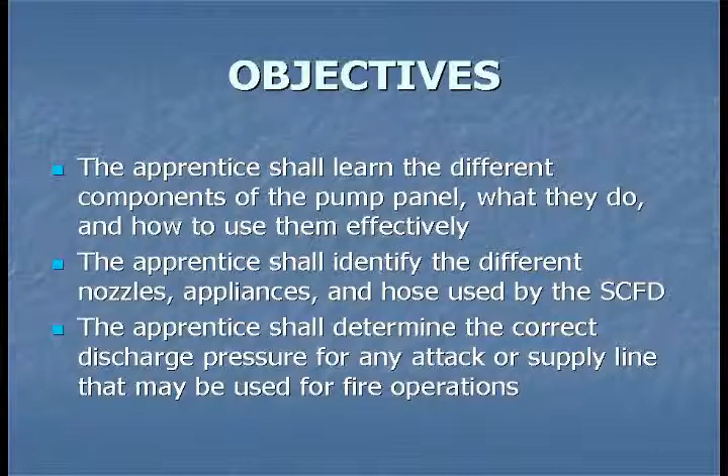Let's start with the pump. On the pump panel, you will find a pump rating plaque. This will tell you what the pump is rated for in GPMs. It's also important to know the amount of water carried on your truck so you can calculate how long your tank will last. There should be a plaque on the pump panel showing the amount. If not, you need to find out.

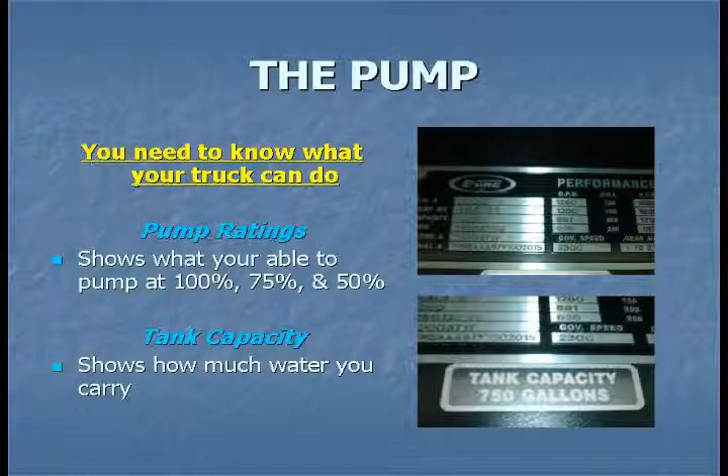In this department, we have two different types of pump panels: midship or crossover, and the side panel. While they look totally different, they both have the same functions. Now let's talk about them.

The tank-to-pump valve is used by the operator to supply the pump with the water stored in the tank. Remember to shut this valve when you have a secure water supply. If not, you'll end up using the water out of your tank.

The tank-to-fill valve fills the water tank back up once you have a supply. It's important to remember to keep the tank filled in the event you lose the supply line.

The throttle increases or decreases the RPM of the engine, in turn increasing or decreasing the pump discharge pressure. The pump pressure gauge indicates the maximum pressure you're getting out of the pump for that given RPM.

Discharge valves correspond to the discharge ports around the truck. Make sure you verify the correct valve for the port the hose line is attached to before opening any discharge valves.

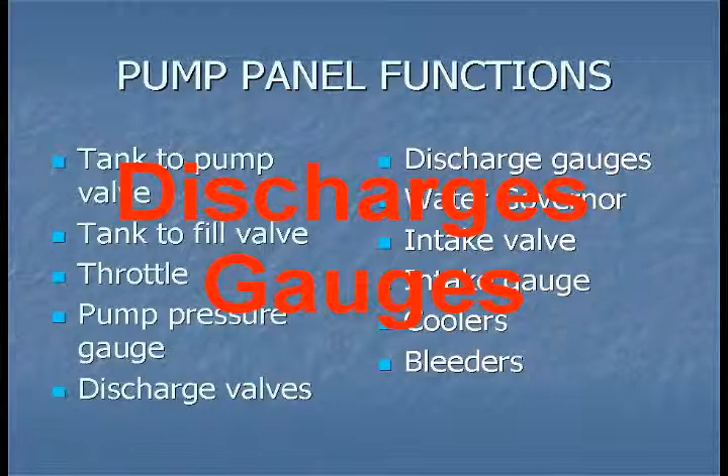Discharge gauges show the pressure on the individual ports. Use these gauges to gate down hose lines in the event multiple hose lines have been deployed.

Water governors and pressure relief valves are both designed to prevent overpressurization of a hose line, which could possibly cause firefighter injury. The water governor works by RPMs. Once the water governor is set, the computer will decrease the RPMs if it senses an increase in pressure.

The pressure relief valve is a mechanical valve and works off spring pressure. When the pressure increases beyond the setting of the relief valve, the spring pressure is overcome, causing the water to be dumped back into the intake side of the pump.

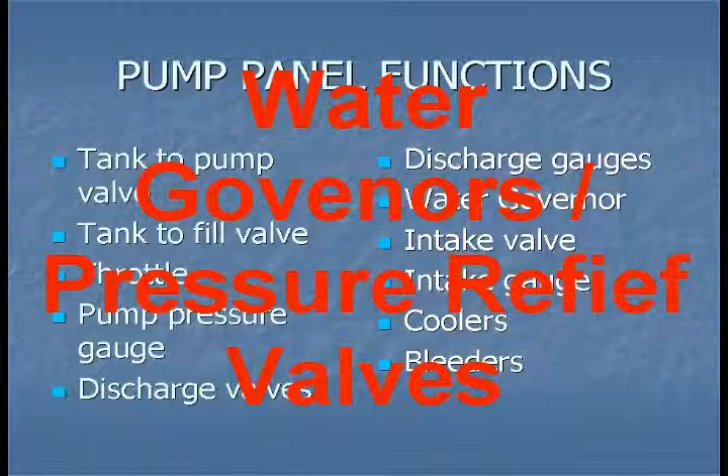Intake valves are typically located next to the intake port. Opening the valves with a water supply hooked to the port will allow water to enter on the intake side of the pump.

The intake gauge shows the water pressure coming into the truck. Being a compound gauge, it will show either positive pressure or vacuum pressure measured in inches of mercury.

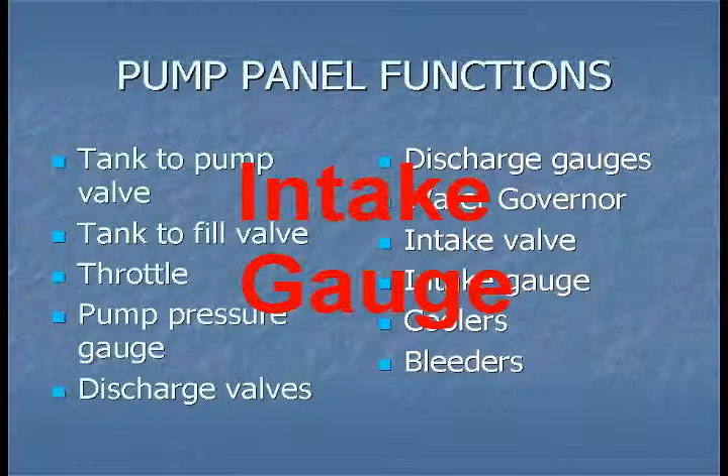Cooler valves are used in the event of extreme engine temperature. Some water from the pump is diverted around the engine cooling system to assist in the cooling. When there's high pressure on the pump, just crack these valves to prevent damage.

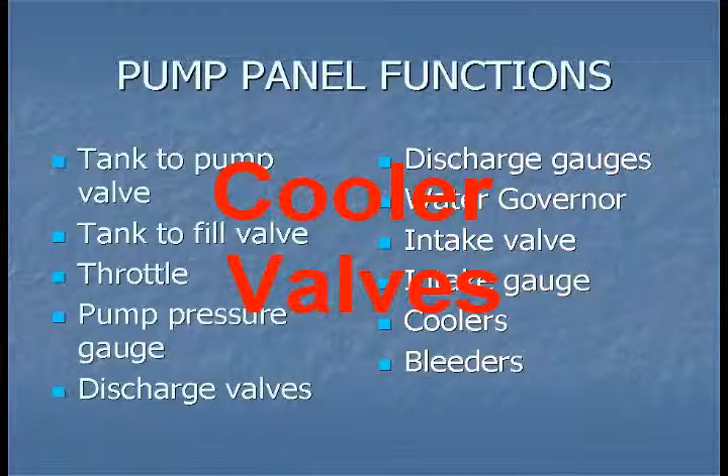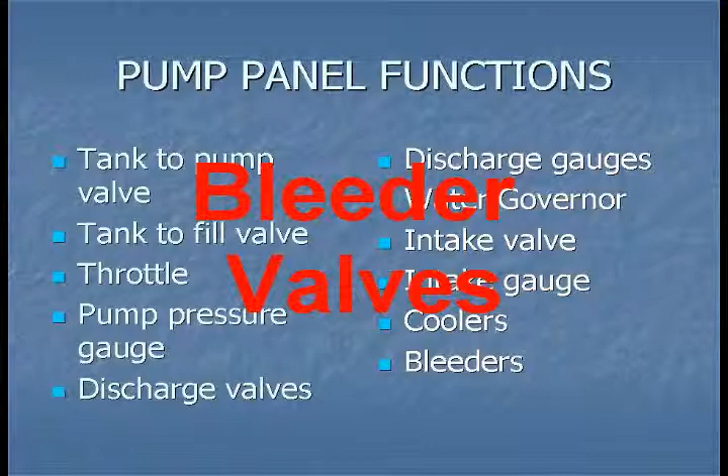Bleeder valves are designed to take the pressure off of the hose to assist in draining the hose line. Work these valves slowly, as there may be a lot of pressure on them. These valves need to be kept closed during pumping operations. Now that we've talked about the functions, let's take a minute to view their locations on the two different types of panels.

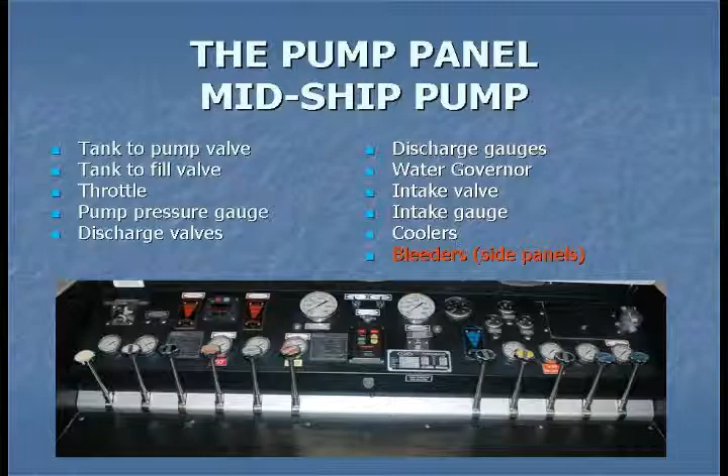Protect the public, that's my desire. Back of my shirt says Tulsa Fire. I take a good look around. I keep a close watch over this town. Gotta make it right, gotta go a little higher. American firefighter. Might be a house, might be a wreck, could be a baby, might be a pet. Yeah, we're prepared to make them all, ready and able for the next call. Gotta make it right, gotta go a little higher. American firefighter. We stick together through thick and thin. They might need me, I might need them. As the heat gets hotter, we fight to win. I walk away alive, alright. Gotta make it right, gotta go a little higher. American firefighter.

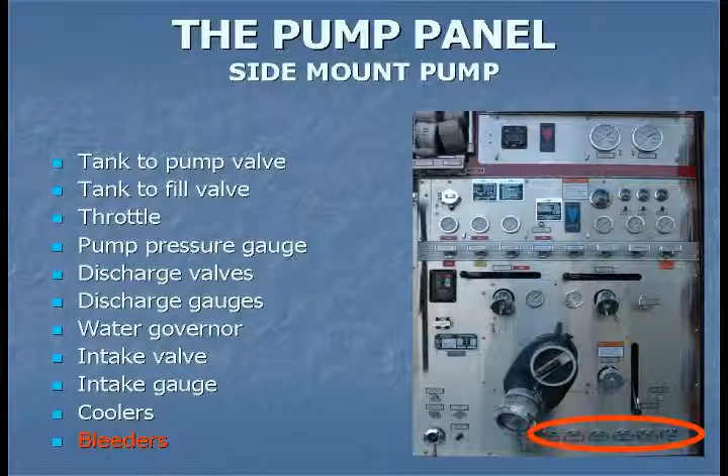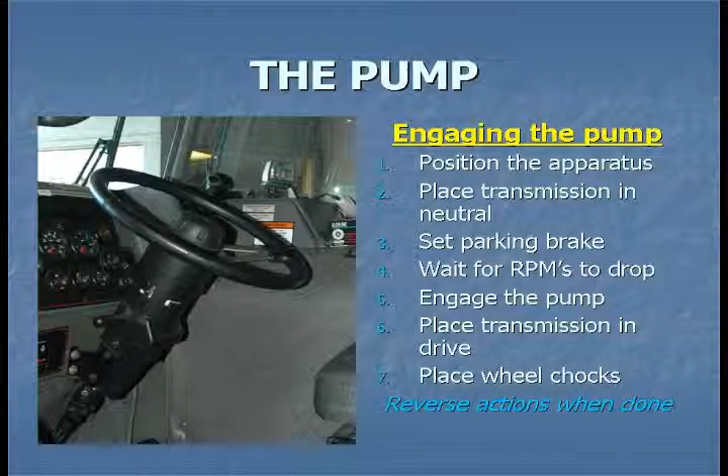Engaging the pump is pretty much the same throughout all our engines. Okay, you've pulled up on scene. You've placed the vehicle in the best possible vantage point. You place the transmission in neutral, set the parking brake, and wait for the RPMs to drop.

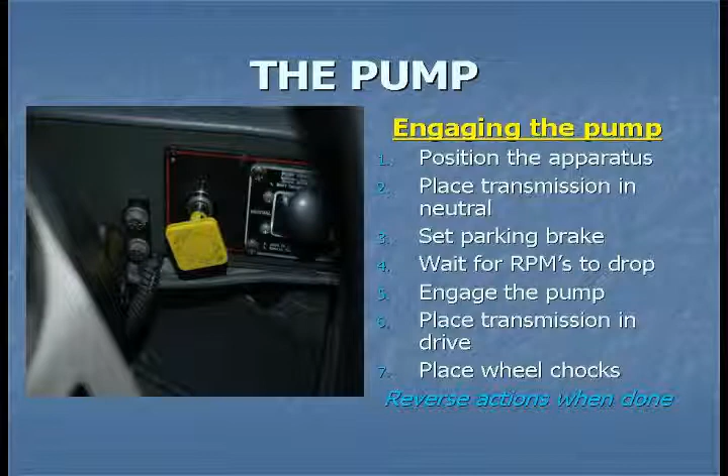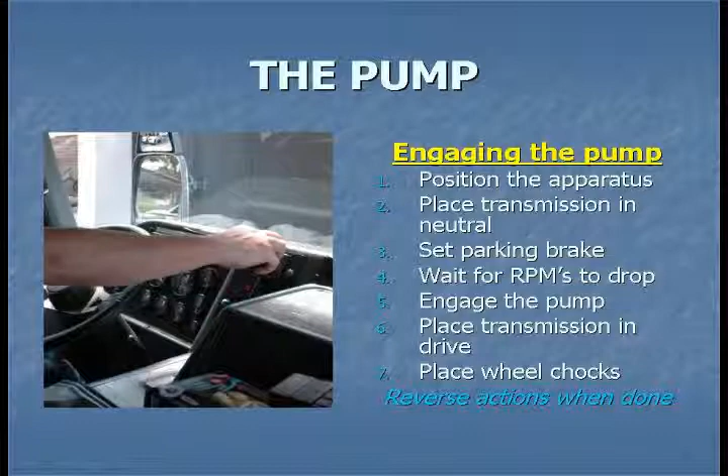Waiting for the RPMs to drop is important. If you don't, you could possibly damage the pump. Engage the pump, place the transmission in drive, and please don't forget to place the wheel chocks.

Okay, now let's put it all together. With the truck positioned to the best advantage, place the transmission in neutral, engage the brake, wait for the RPMs to drop, engage the pump, and switch the transmission to drive. Carefully exit the vehicle and proceed to put the wheel chocks down.

You'll find one of two types of throttles on the pump panels, either the older manual type or the newer automatic type. The manual type requires the operator to turn the knob in order to increase or decrease RPMs. Also, the manual type has an emergency stop button. Simply push the button with your hand and the throttle will return to idle. This should only be used in the event of an emergency.

With the automatic throttles, the operator is required to first select the pressure mode. Then, by using the increase button, push and hold until the desired RPM or pressure is reached. In the event of an emergency, simply push the idle button and the RPMs will drop to an idle. Remember though, you must reset the mode before you resume pumping.

These units are operated by a computer. There are no emergency backups, and the operator should keep an eye on the message center.

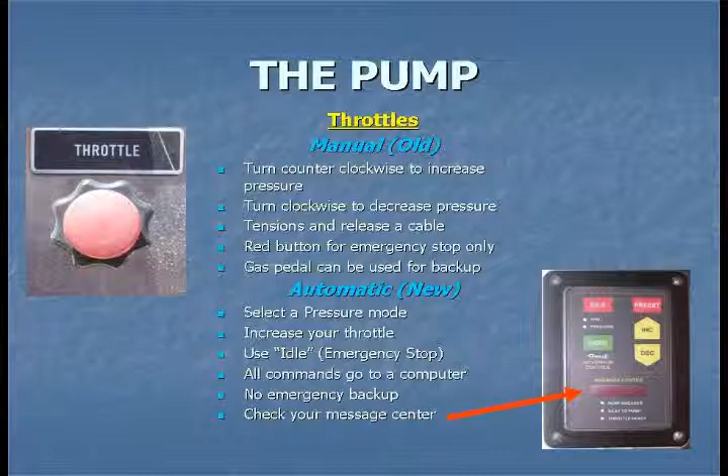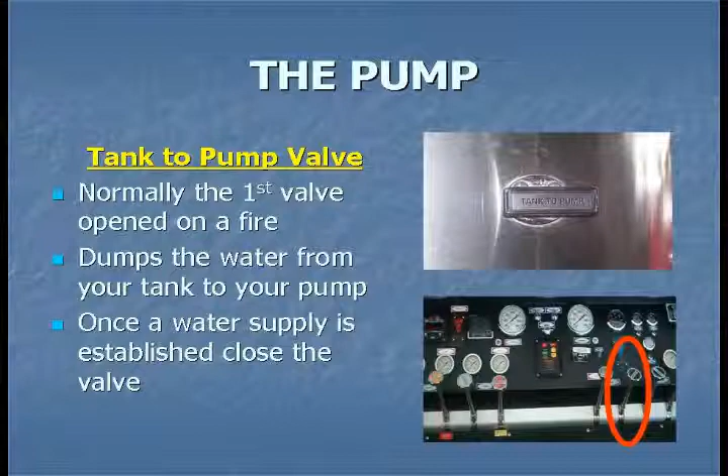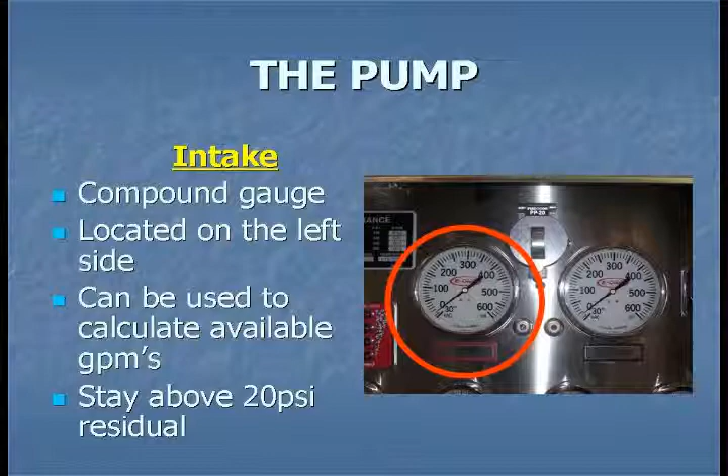Once on scene and the truck in pump, the first valve normally pulled or opened will be the tank to pump valve. This will allow water from your tank to enter your pump and you can start supplying hose lines immediately. With the tank to pump valve open, the intake gauge should still read about 0 or a little below due to the fact there's no positive pressure coming in. The intake gauge can be used to calculate available GPMs. Also remember, always keep the intake gauge above 20 psi.

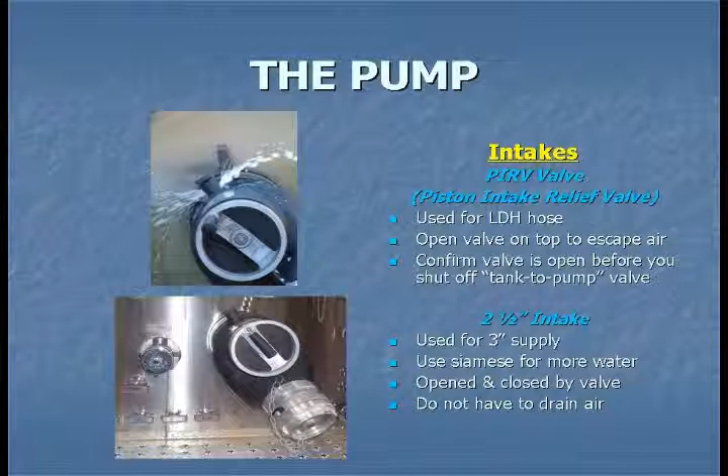Now, your tank water's running low, and you finally get a water supply. You can get that water into your pump one of two ways, either through the piston intake relief valve, the PIRV, which is used for large diameter hose, or the smaller 2.5 inch intake, which can also be supplied with a 3-inch line. If your supply line is a large diameter hose, you must use the PIRV valve. Due to the fact large diameter hose can trap quite a bit of air, it's important to bleed the air off by using the bleeder valve on top of the PIRV valve. Once the air has been bled out of the line, close the bleeder valve and open the intake valve. If your supply line is 3-inch, connect it to the 2.5 inch intake and open the valve.

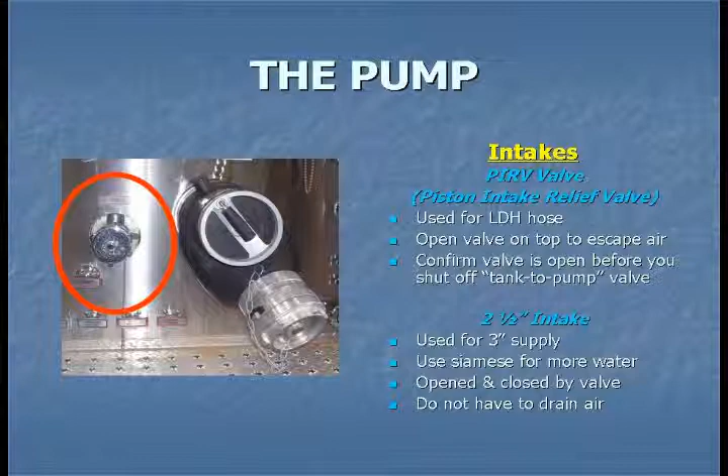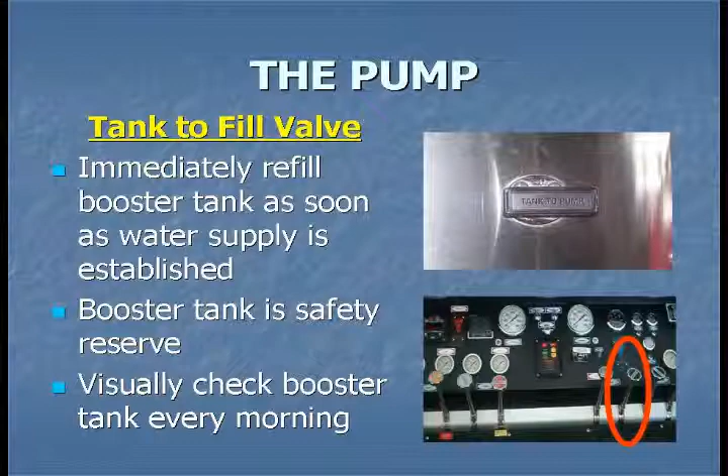As soon as the water supply has been established and you've readjusted the pressures, it is important to remember to start refilling your water tank using the tank to fill valve. This tank will be used in the event you lose water supply. If this happens, the operator must notify command immediately, and a transition to the water tank must be made.

Let's talk about cavitation for a moment. Cavitation occurs when you try to pump more water than is available. It also occurs if air enters the pump. The sound a pump makes when cavitation occurs is very distinctive, and some say it sounds like rocks in a dryer. Although I've never personally heard the sound rocks make in a dryer, believe me, you'll be able to hear the cavitation.

Cavitation, if left unchecked, will damage the pump. To prevent it, reverse the last action that you just performed. Make sure all intakes are fully open. Slowly decrease the pressure of the last hose line opened, or lower the RPMs. But remember to always keep the intake pressure above 20 psi residual pressure.

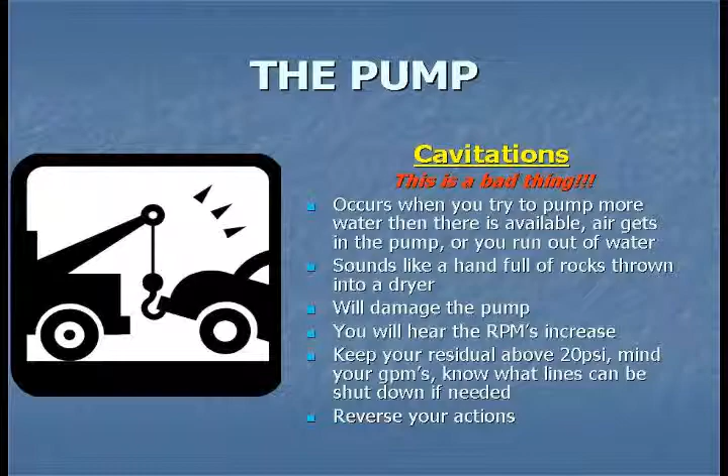The following clip will show the pump operator pulling the tank to pump valve and increasing the RPMs.

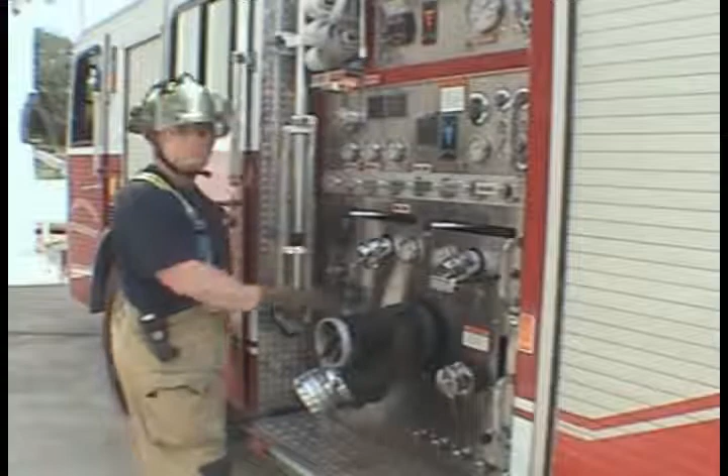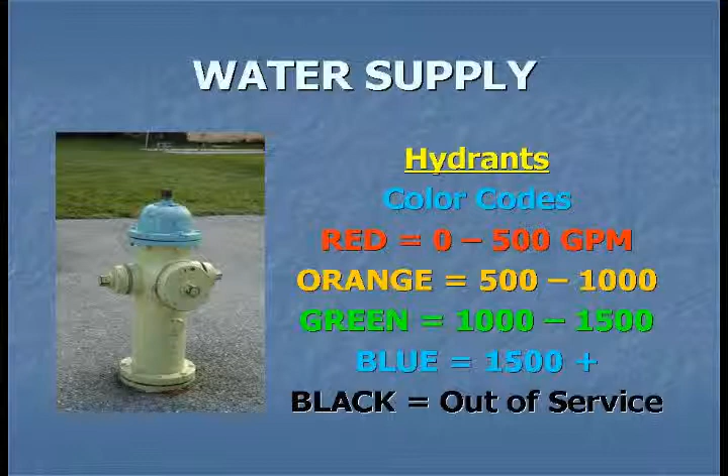As a pump operator, it's important to know the capacities of the hydrants. These are marked by the colors on their bonnets. When hooking a hydrant, it's important for the driver to go past the hydrant about 20-25 feet. This will make it easier for the hydrant operator to get the equipment from the rear of the truck. As a hydrant operator, you'll need to grab the LDH, the hydrant connection, hydrant wrenches, single gate valve, 5-inch spanner wrenches, and that all-important portable radio.

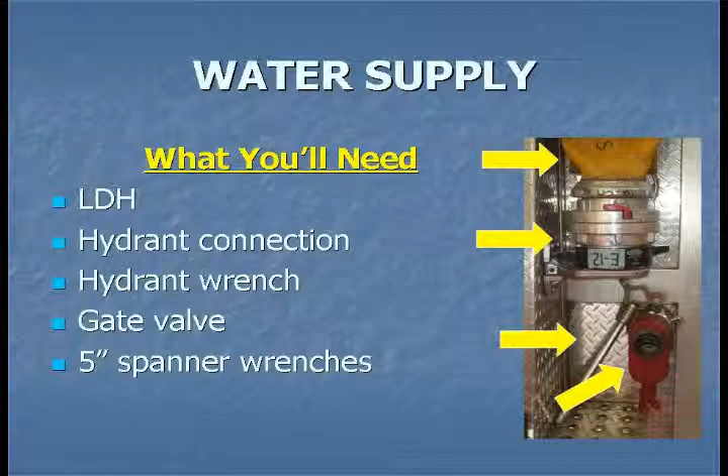Let's talk a little bit about wrapping the hydrant. Once all the equipment is off the truck, wrap the hose around the hydrant, making sure you're on the inside of the hose line, just in case the hose being laid gets snagged on the hose bed. Wave or radio the driver on, and once there's enough hose on the ground, remove the 2.5-inch cap and the steamer port. Before hooking anything to the hydrant, remember to flush it.

Open the valve all the way till the water runs clean, and then shut her down. Connect the single gate valve and the hose line to the steamer port. If they're not screaming for water yet, let them know the hydrant is ready and wait for the go-ahead. Remember to open the hydrant all the way and to leave the hydrant wrench on top of the hydrant before you leave. Now let's put it all together.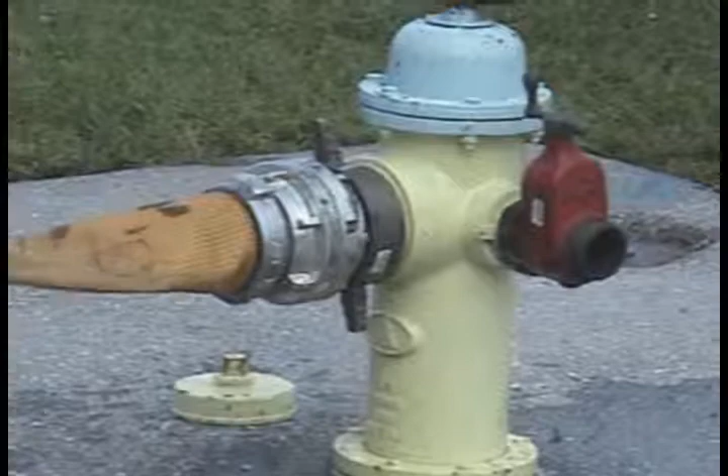Adjust the hose so there's no kinks. Radio to the driver that the hydrant's hooked. It's ready for water.

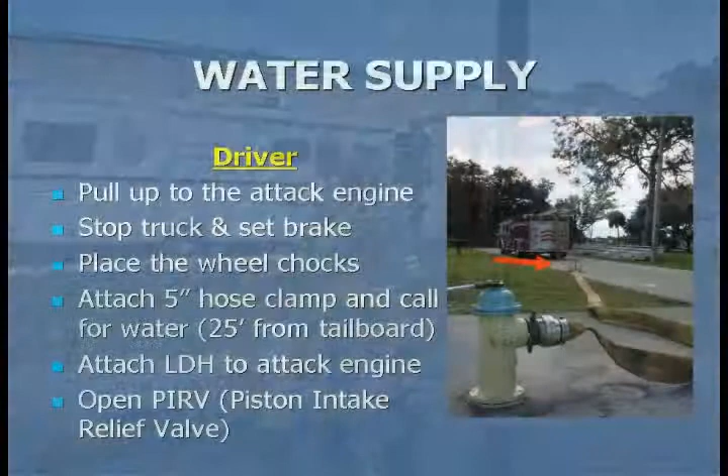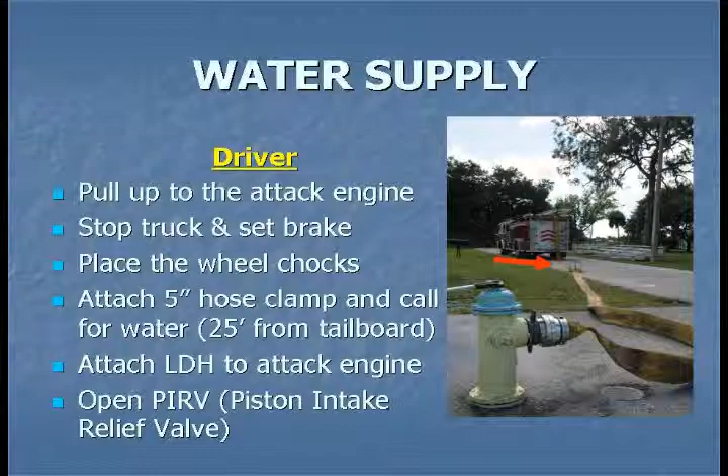Okay, we've just got the go-ahead from the hydrant operator, and we're en route to the fire. Whether laying a line for yourself or for an engine at the fire, the process is pretty much the same. Pull up to the engine or the fire, set the brakes, and if it's for yourself, don't forget to engage the pump. Place the wheel chocks and place the hose clamp at least 25 feet from the tailboard and 5 feet from the coupling on the supply side. And go ahead and make the connections.

Now, let's talk about nozzles and equipment. The 1.5-inch adjustable fog nozzles are the most common nozzles found on the engines. These nozzles can be adjusted to flow between 30 and 200 gallons per minute. But remember, our directives say that they need to be set at 95 GPM when these hose lines get repacked. An advantage these nozzles have over others is that they can be taken apart to create a 15/16 solid bore nozzle, or to extend a hose line.

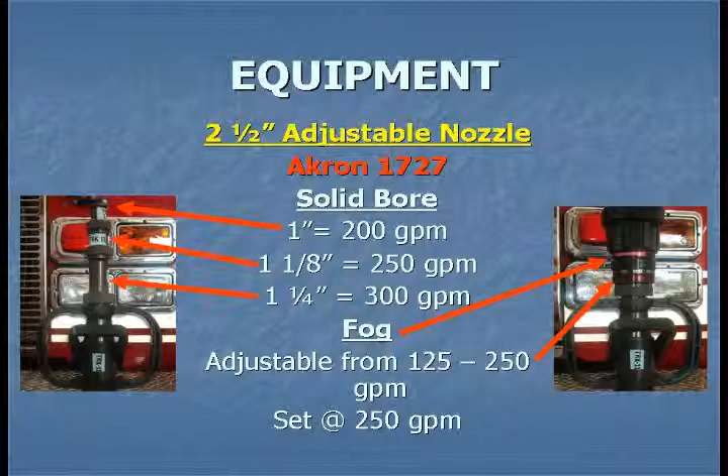The 2.5-inch play pipe can either accommodate stack tips or an adjustable fog nozzle. The solid bore stack tips for handheld streams range from 1 inch to 1.25 inches, depending on GPM required. The 2.5-inch fog nozzle ranges from 125 to 250 gallons per minute. The other type of nozzles found on the trucks are automatic fogs.

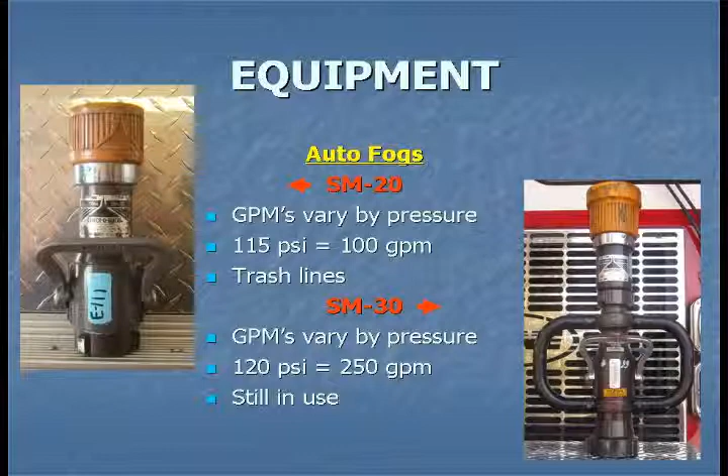The 1.5-inch automatic fog nozzles are primarily used for trash lines, and their GPMs vary by pressure. For instance, with the engine pressure of 115 psi, giving the nozzle 100 psi, the GPM would be 100 gallons per minute. The larger 2.5-inch fog nozzle also depends on pressures to produce GPMs. For instance, at 120 engine pressure, with 100 psi nozzle pressure, it'll produce 250 gallons per minute, and you'll still find these in use today.

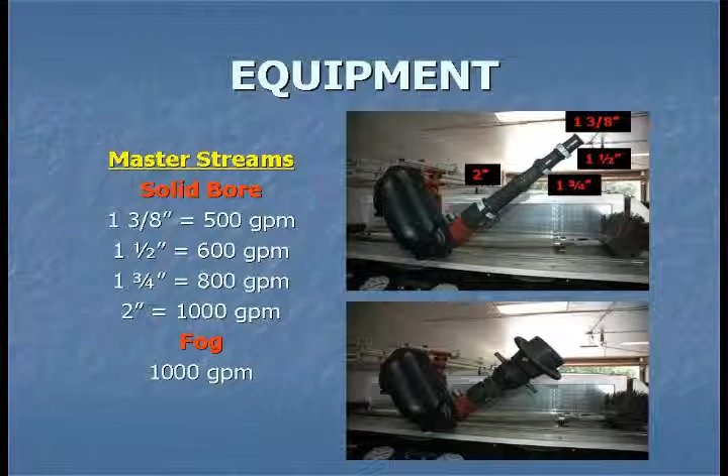For master streams, the solid bore tips range from 1 3/8 inches to 2 inches, and from 500 gallons to 1,000 gallons. The fog nozzle can produce 1,000 gallons a minute. All of the deck guns, with the exception of the remotely controlled deck guns, can be removed to be placed on the ground. Some of our engines are equipped with mercury monitor nozzles. These are 500 GPM nozzles that are designed for rapid deployment. They can be used with fog or solid bore tips and are pre-connected to a 3-inch supply line.

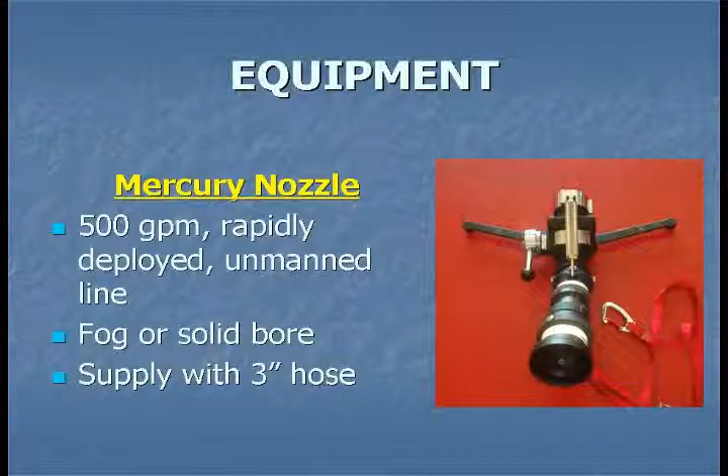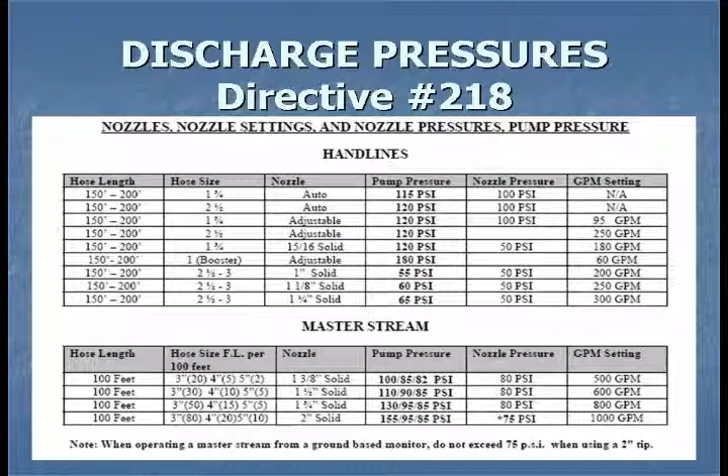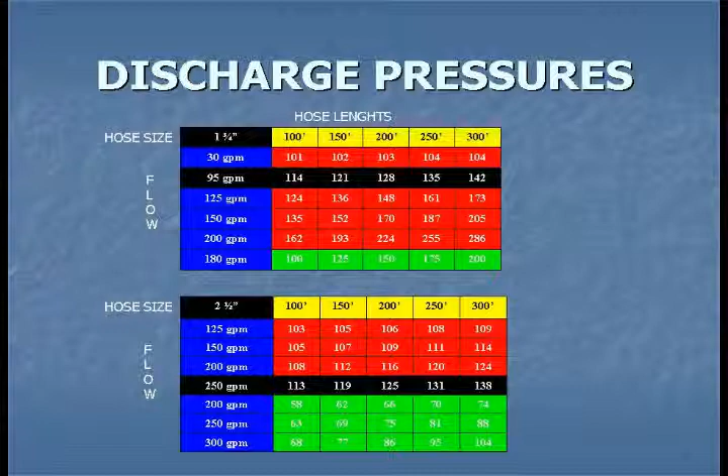Before we put everything together, we need to talk about hydraulics. This includes nozzle pressure, friction loss, and engine pressure. Directive 218 does a good job spelling out the required engine pressure for specific hose lines. But keep in mind, this is only a starting point, and you may be required to flow multiple lines or extended lines. The following charts can be used as quick references for nozzle pressure, nozzle GPM, friction loss for various GPMs, flows and hose sizes, and supply lines. And these charts will be included with your fire mod.

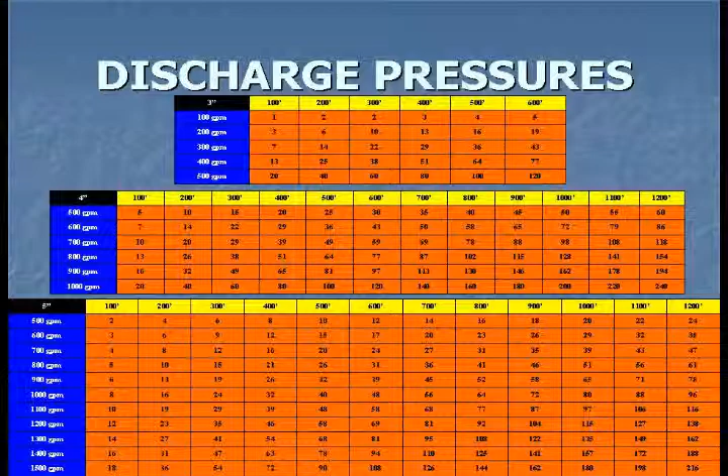Now, the basic friction loss formula is C times Q squared times L, where C equals the coefficient, Q is the flow rate in GPM, and L is the length of hose. Now let's put this into practical terms. Let's assume you have 400 feet of 2.5 inch hose flowing 300 gallons per minute. What do you think the friction loss would be?

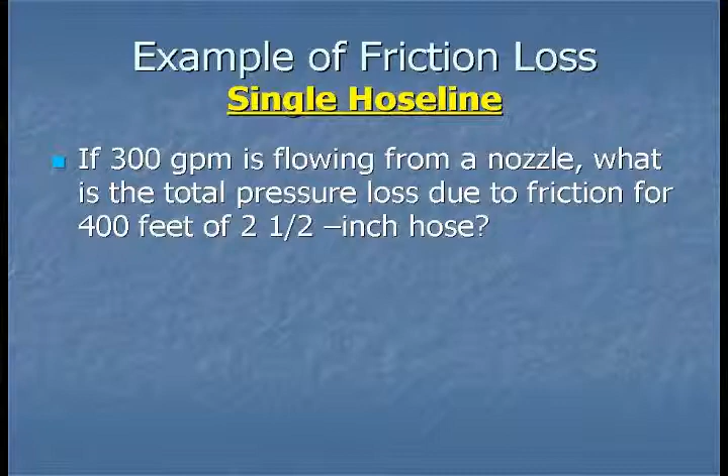In this example, 2.5 inch hose line has a coefficient of 2, so C equals 2. Q, or quantity, is equal to the gallons per minute divided by 100. In this case, 300 gallons divided by 100 equals 3. Therefore, Q equals 3. And L, or length, is equal to the length of the hose line divided by 100.

400 feet divided by 100 equals 4, therefore L equals 4. Now let's put these numbers in the friction loss formula: C equals 2, Q squared equals 3 times 3, and L equals 4. Therefore, 2 times 9 times 4 equals 72. So the total friction loss for this hose line is 72 psi.

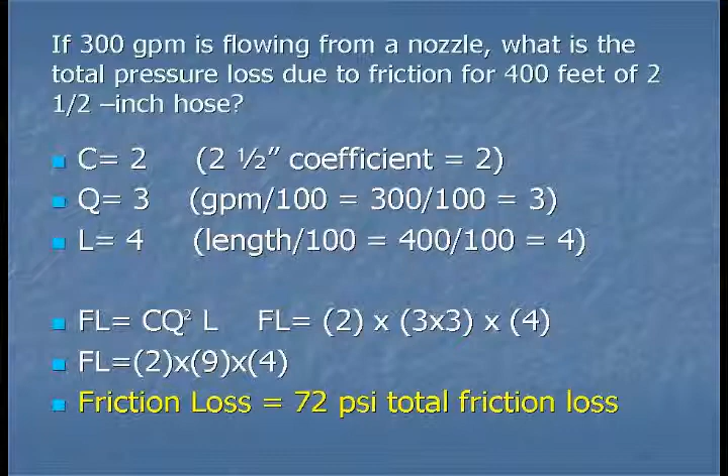Now we figured out the friction loss for this hose line. What do we do with that? We need to add it to one more formula, the engine discharge pressure formula. The engine discharge pressure is equal to the nozzle pressure plus friction loss, plus or minus elevation, plus the appliance.

Nozzle pressure is either 100, 80, or 50 psi. Friction loss is calculated for the individual hose lay, plus or minus the elevation, 5 psi for every 10 feet. And the friction loss for appliances can range from 5 to 25 psi.

Now let's plug these numbers together. With a nozzle pressure of 50, let's say a handheld solid bore nozzle, friction loss of 72 psi, no elevation, and no appliance, we simply add the numbers together. 50 plus 72 equals 122, which means the discharge pressure would be 122 psi.

In the event where you have a single hose line made up of two different size hoses, let's say 200 feet of 2.5 and 150 feet of 1 3/4, and you're flowing 95 gallons per minute through a fog nozzle, you would calculate the friction loss for the 200 feet of 2.5 flowing 95 GPM and the 150 feet of 1 3/4 flowing 95 GPM, and then simply add them together. And don't forget the appliance.

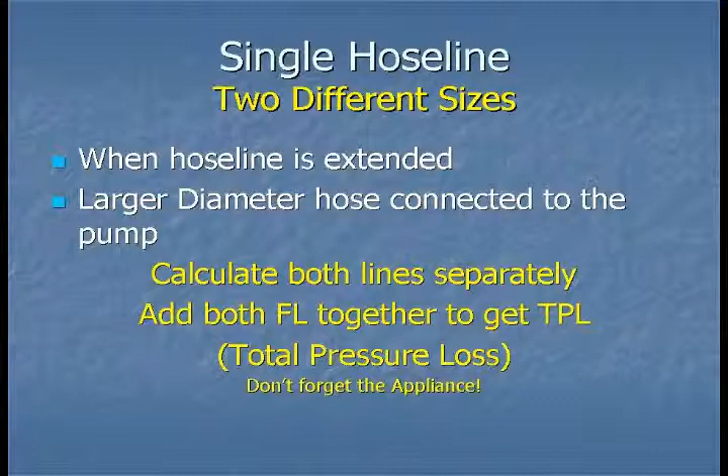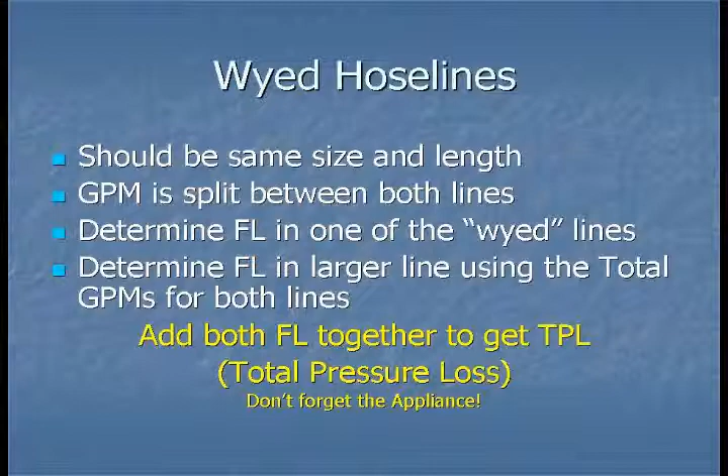When we talk about wyed hose lines, we're generally talking about 2.5 inch or 3 inch hose into an appliance and two smaller hose lines to the fire. To calculate the friction loss for this hose line, simply take the total GPM and divide it by 2. Use that number to determine the friction loss for one of the wyed lines. Then determine the friction loss for a larger hose line, using the total GPMs from both wyed lines. Add these numbers together, include the appliance and the nozzle pressure, and this is your engine discharge pressure.

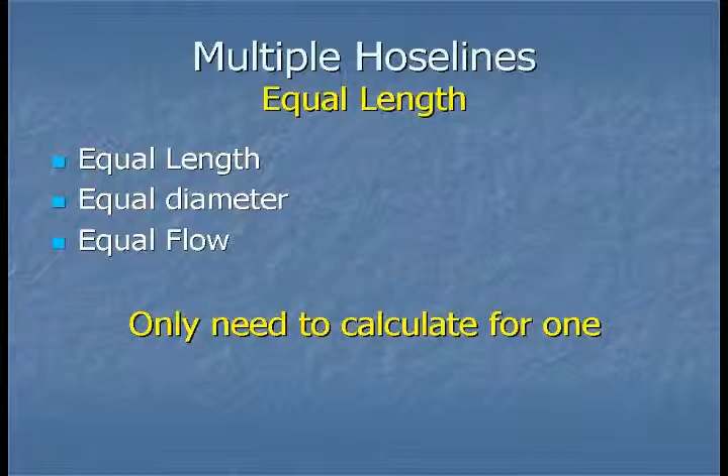For multiple hose lines of equal length, equal diameter, and equal flow, you only need to calculate for one. In the event you have multiple hose lines of unequal length, diameter, and flow, you'll need to calculate for each one individually. Set your pump discharge to the highest pressure and gate down the rest.

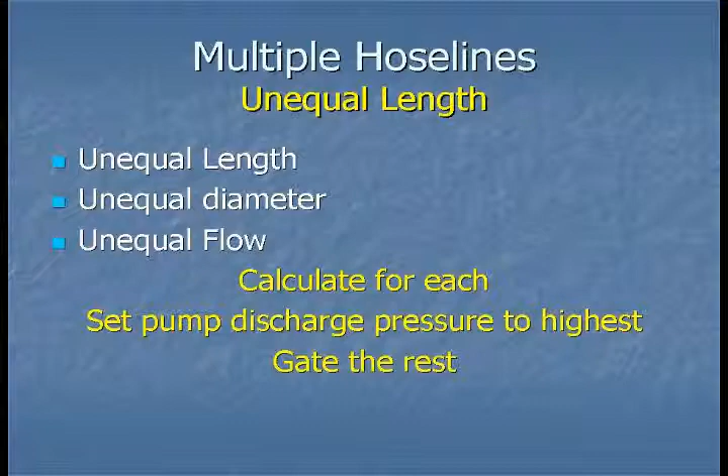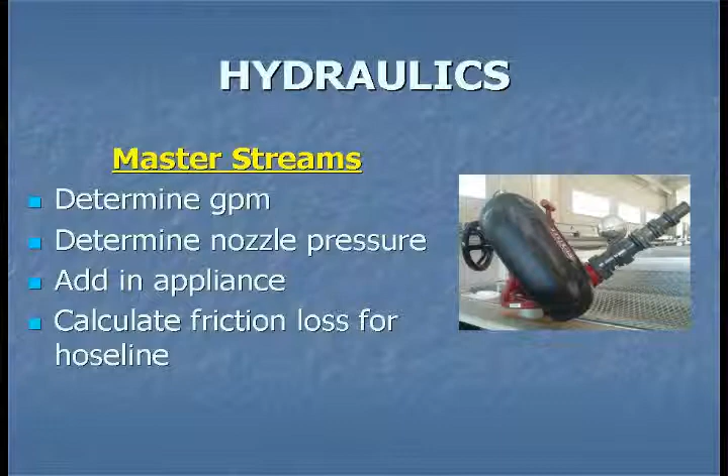To calculate the nozzle pressure for pre-piped master streams, use 80 psi as the nozzle pressure plus 25 psi for the appliance. To determine the friction loss where multiple lines are coming into the master stream, simply divide the total GPM by the number of hose lines supplying the device and calculate the friction loss for one of these lines. Add the nozzle pressure, elevation, and appliances, and that's your discharge pressure.

Last but not least, how do we determine if we have enough water left in our supply to open up more hose lines? First, once you have a secure supply, before opening any hose lines, make a mental note or a mark of where the intake pressure is. Let's say, for example, you have 50 psi on the intake gauge before any valves are open.

We take the first number and create a scale of times 1, times 2, and times 3. In our example of 50 psi, 5 being the first number, we would take 5 times 1, 5 times 2, and 5 times 3. Mark the intake pressure after opening the first hose line.

If the residual pressure on the intake gauge drops by 5 psi or less, 2 more lines can be opened with the same GPM. If the residual pressure drops between 10 and 5 psi, only 1 more hose line with the same GPM can be opened. And if after opening the first hose line the residual pressure drops 15 to 10 psi, no more hose lines can be opened.

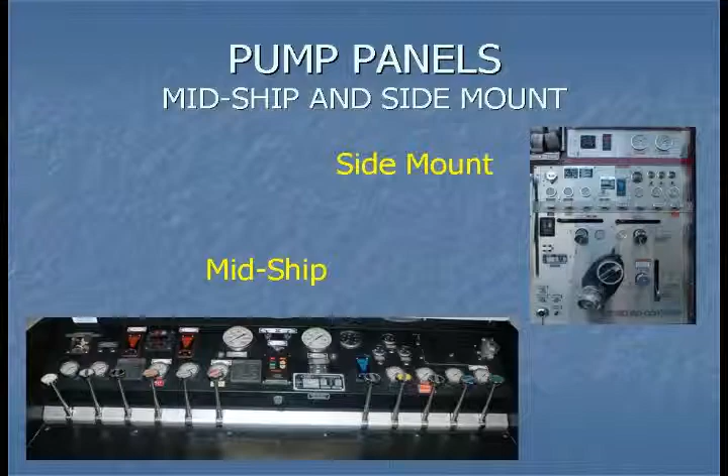This concludes the pump operations presentation. We've discussed the different components of the pump panels, what they do, and how they're used. We've discussed the different nozzles used by Sarasota County Fire Department, their pressures, and their GPMs. We've discussed the friction loss formulas, the engine discharge pressures, and how to calculate for various hose lines. And we talked about how to determine if we can open more hose lines with the available water supply.

Again, this presentation is intended to show the basics of pump operations. It is not intended to replace the hands-on training.